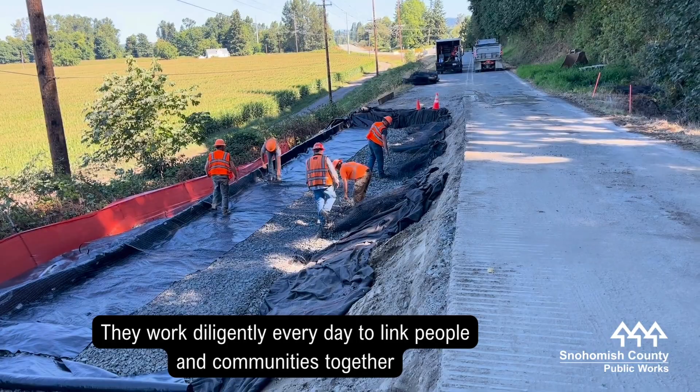I'm proud to serve alongside more than 600 dedicated professionals in the department's 5 divisions: road maintenance, engineering services, transportation and environmental services, solid waste, and administration. They work diligently every day to link people and communities together in Snohomish County by providing the best services and building the best infrastructure possible.

To highlight the important work our staff have accomplished over this past year, I'm pleased to present the 2025 Public Works Annual Report, Building Bridges and Connecting Communities.

2025 was the year of bridges. Snohomish County has more than 200 bridges located over nearly 2,200 square miles. Staff replaced 2 bridges on opposite ends of the county and provided maintenance for the iconic 76-year-old Red Bridge near Granite Falls. Without functioning bridges with up-to-date standards, travel and commerce, literally everything can come to a standstill, with people cut off or impacted by crossing restrictions.

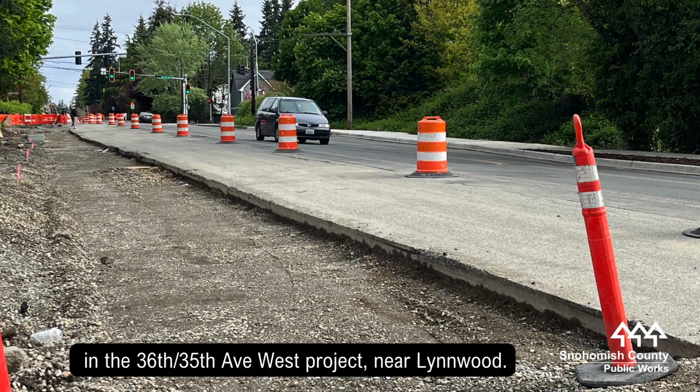Connecting Communities also took the form in the 36th/35th Avenue West project near Lynnwood. The project improved and modernized the 2-lane north and south roadway for an ever-growing population. It's important that we keep up with population growth and find ways to balance both human and environmental needs.

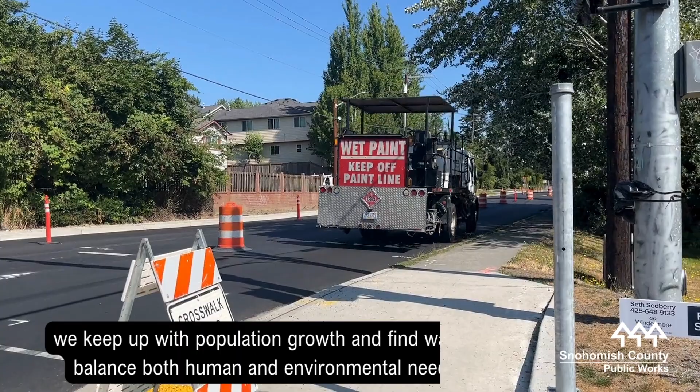The Solid Waste Division continues to fund operations at our 3 transfer stations and 3 drop box locations. The division processes more than 670,000 tons of garbage annually and processes household hazardous waste at our dedicated facility. These services are continuing at acceptable levels thanks to rates and fees being increased for the first time since 2009.

We're continuing to find ways to connect and build partnerships with our stakeholders. One example is the successful Adopt a Road program. In 2008, people imagined a partnership between residents and the county that would build community pride. 18 years later, the program is still going strong, with more than 40 resident-led groups maintaining sections of the county roadsides. We simply cannot do the work alone. We need community-minded people partnering with us to ensure county roadways are free from litter.

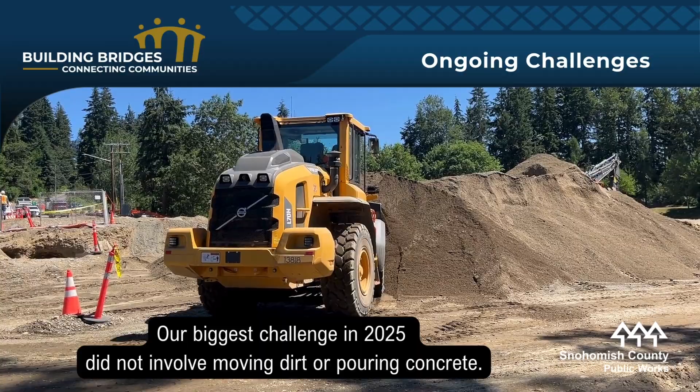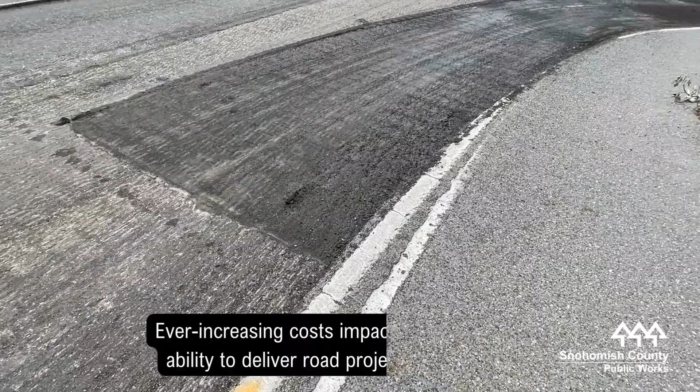Our biggest challenge in 2025 did not involve moving dirt or pouring concrete. It's been facing the complexities connecting our communities while weathering the impacts from inflation. Ever-increasing costs impact our ability to deliver road projects, obtain and service equipment, and provide maintenance for county infrastructure.

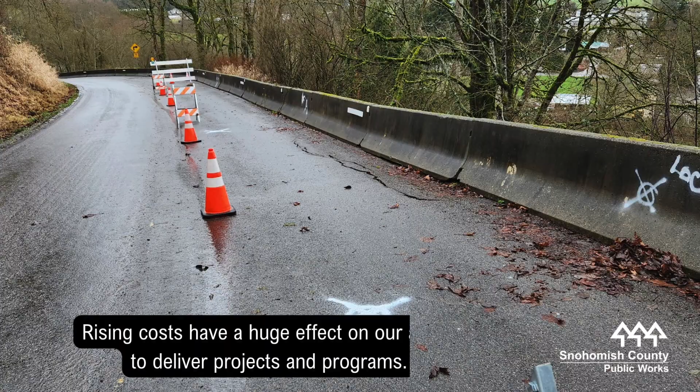Our staff have improved processes to save time and money, and we've also delayed capital projects because of the higher costs in their planning, design, and construction. We have kept and will continue to keep many positions vacant across the department. Rising costs have a huge effect on our ability to deliver projects and programs.

In 2026, we will continue to strategize and explore other funding mechanisms to keep services and projects moving as best we can. However, we're not out of the woods yet.

I'm proud of our teams for their continued work through adversity and uncertainty. I also appreciate our county leadership working with us to make sure taxpayer funds are spent wisely and the needs of our county residents, businesses, and visitors are met in these trying times.

We hope you enjoy our annual report. We're proud of the work done in 2025, and we're looking forward to maintaining our award-winning standard of excellence in 2026.

Whether our staff are building a mammoth structure, widening a busy road, or poring over a balance sheet, you can rest assured that Public Works is up to the task of building and bridging our community's needs now and into the future.

Hi, I'm Doug McCormick, Snohomish County Engineer and Deputy Director of Public Works.

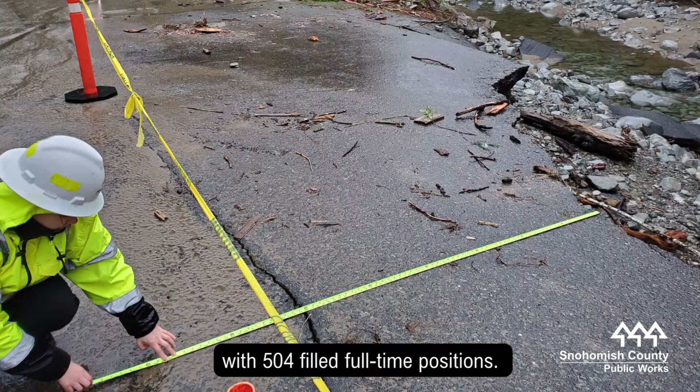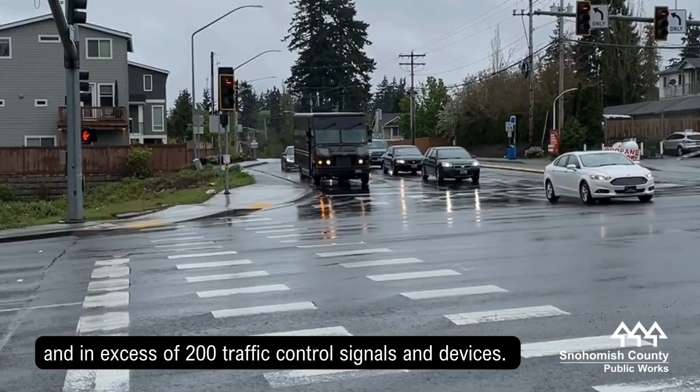Public Works is the second largest department in Snohomish County government, with 504 filled full-time positions. It is responsible for approximately 1,600 miles of county roads, 210 bridges, and in excess of 200 traffic control signals and devices. The department also processes more than 670,000 tons of garbage per year. Our mission is to focus on safety and mobility while practicing fiscal responsibility and preserving the environment.

You can learn more about Public Works, including information about our department budget, grant funding, and our department leadership by visiting snohomishcountywa.gov/publicworks.

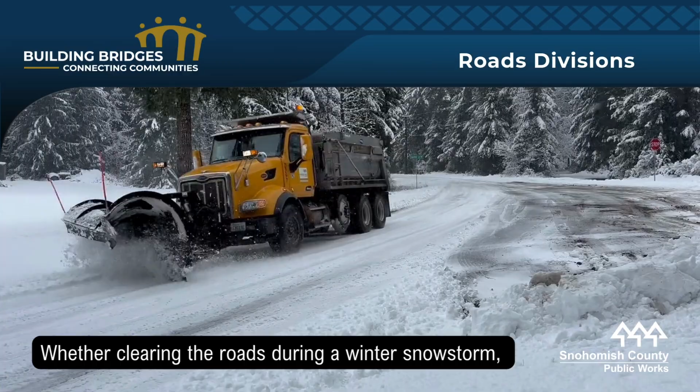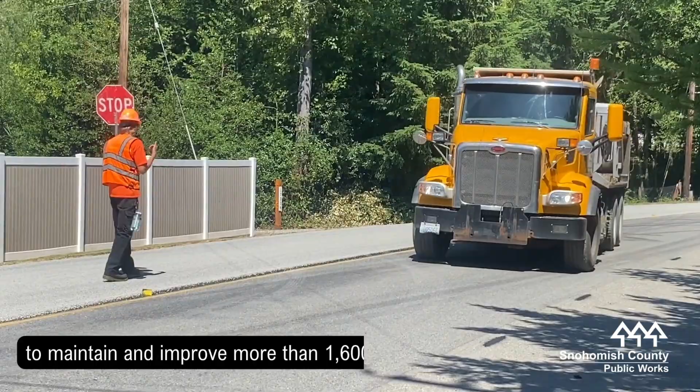Whether clearing the roads during a winter snowstorm, conducting road maintenance during the summer, planning road improvements to accommodate growth, or coordinating traffic light synchronization throughout the year, 3 divisions of Public Works keep residents moving. The Engineering Services, Transportation and Environmental Services, and Road Maintenance divisions work together to maintain and improve more than 1,600 miles of roadway, 210 bridges, and manage about 200 traffic control signals.

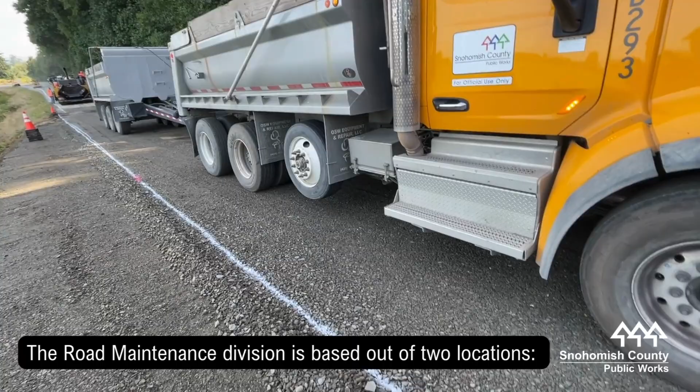Approximately half of those signals are within city limits and are managed for local cities. The Road Maintenance Division is based out of 2 locations, Arlington and Cathcart, located south of the city of Snohomish. The division performs most traditional public works functions, including maintaining and construction of the county's bridges, streets, and roads. Road maintenance also responds to emergencies such as floods, snow events, and windstorms.

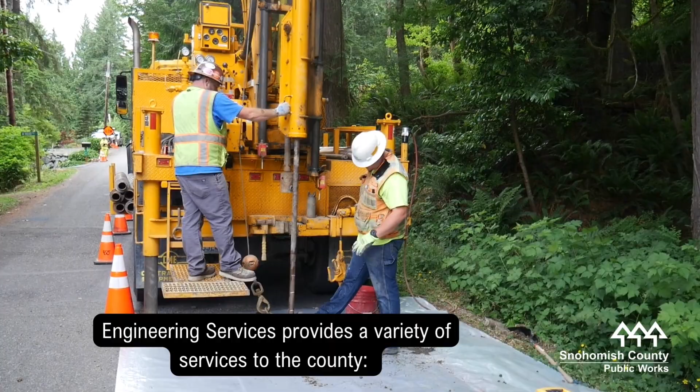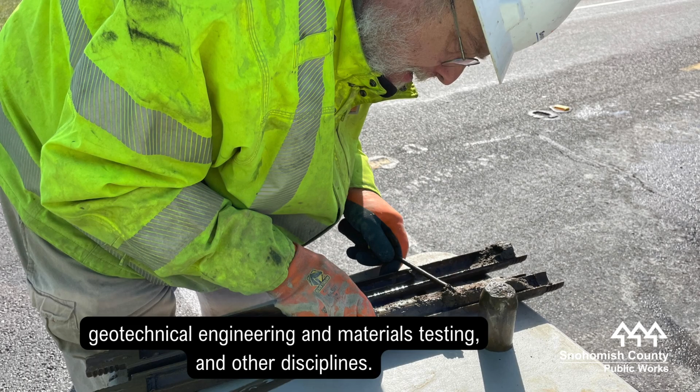Engineering Services provides a variety of services to the county: design and project development of roads and bridges, right-of-way acquisition and survey control, geotechnical engineering and materials testing, and other disciplines. Engineering Services also handles citizen inquiries about ongoing county capital road and bridge projects.

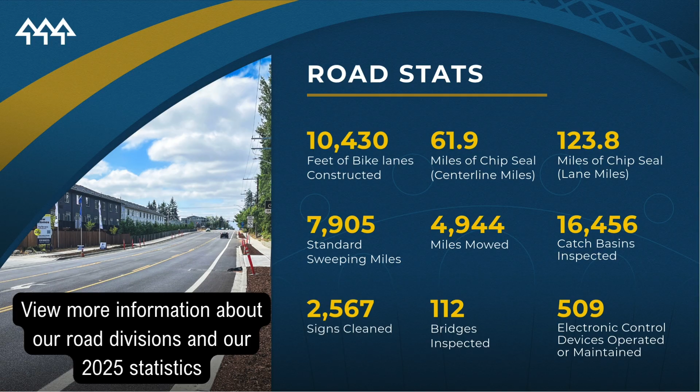View more information about our road divisions and our 2025 statistics by going online at www.snohomishcountywa.gov/204.

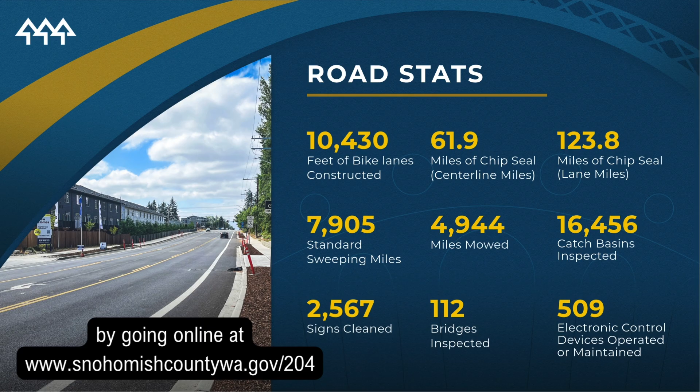The Snohomish County Public Works Solid Waste Division, in coordination with many service providers, oversees all county programs and facilities for the disposal of household hazardous materials, garbage, and recycling. Local garbage haulers transport waste collection from residential curbsides to 3 transfer stations in Mountlake Terrace, South Everett, and Arlington. The division also operates 3 drop boxes in Sultan and near Granite Falls and Lake Stevens.

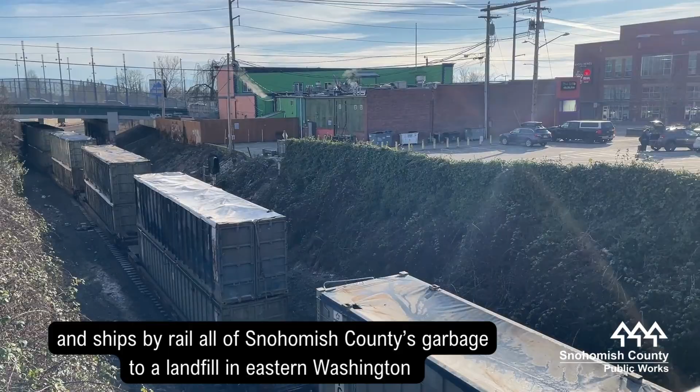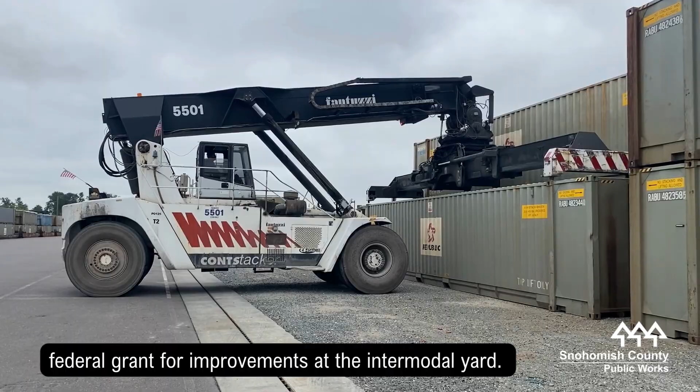From there, solid waste consolidates and ships by rail all of Snohomish County's garbage to a landfill in eastern Washington from the county's intermodal yard in North Everett. In 2025, the county received a $2 million federal grant for improvements at the intermodal yard. Plans are underway to add a second rail line at the facility to more efficiently manage the flow of processed waste on its way to landfills.

A couple of notable changes will take place in 2026. The Solid Waste Division will raise fees for the first time since 2009. This increase will allow the division to maintain current levels of service. For our current fee schedule, visit www.snohomishcountywa.gov/6739.

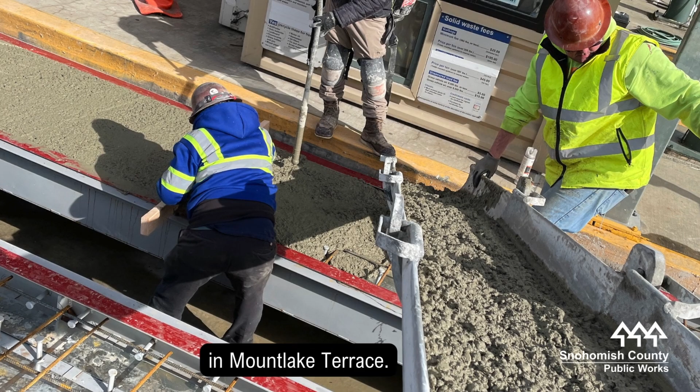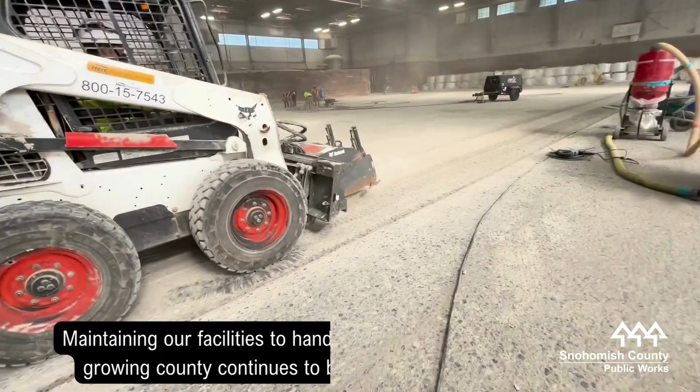In 2026, the Solid Waste Division is planning to replace its weigh scales at the Southwest Recycling and Transfer Station in Mountlake Terrace. The division also plans on repairing and improving the tipping floor at the Airport Road Recycling and Transfer Station in Everett. Maintaining our facilities to handle the needs of our growing county continues to be a top priority, and we're doing everything we can to ensure tax dollars and fees are used properly.

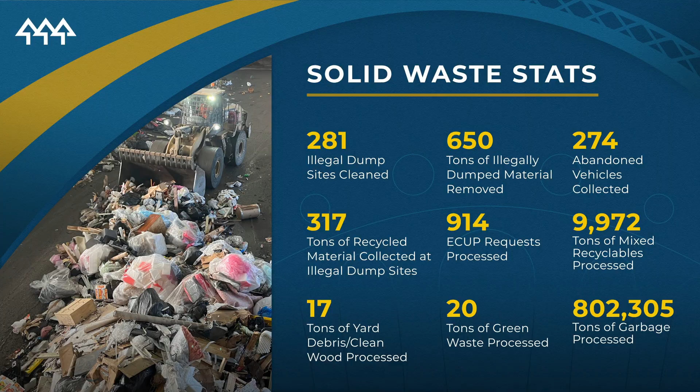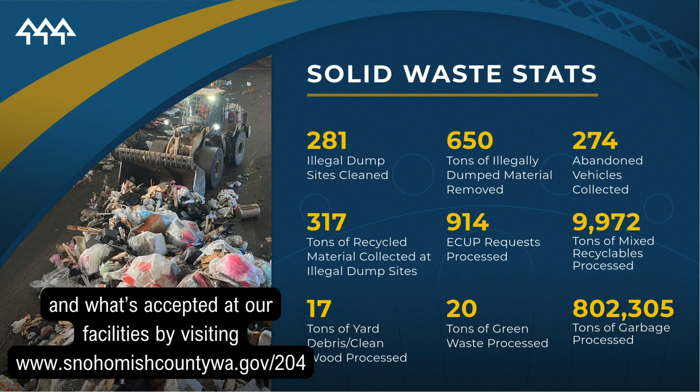You can view more information online, including our 2025 statistics and what's accepted at our facilities, by visiting www.snohomishcountywa.gov/204.

Public Works continued its award-winning tradition of superior service in 2025 by garnering several prestigious awards. The Index Galena Road Flood Repair Project, which opened in November of 2023, received national recognition from the American Public Works Association as an APWA Project of the Year. After 17 years of challenges, the project restored critical access to a community and reopened a recreational gateway to the upper Skykomish River and Wild Sky Wilderness. For their contributions, Snohomish County Public Works, WSP Global Incorporated, and Goodfellow Brothers were presented with the Project of the Year Award in the Transportation $25 to $75 million category at the APWA Annual Expo in Chicago in August of 2025.

The Little Bear Creek Advanced Mitigation Site project, which won the APWA Project of the Year in 2024, received the Puget Sound Regional Council's Vision 2050 Award. The PSRC Vision 2050 Award recognizes work done in the region that creates a better future for the central Puget Sound. As a winner in the Vision 2050 on the ground category, LBCAMS has demonstrated the PSRC's vision in open space preservation and transportation investments.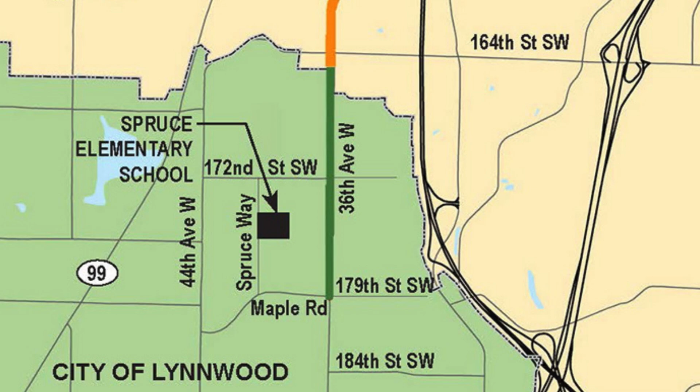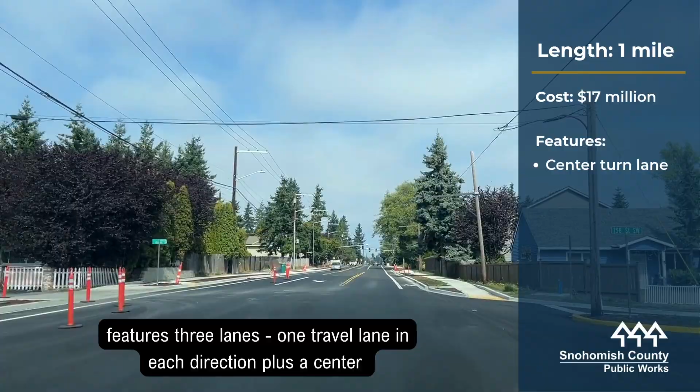Thirty-sixth and 35th Avenues West is a critical north-south corridor in the Lynnwood area. After years of planning and construction by Snohomish County and the city of Lynnwood, the end result is a driver, bicyclist, and pedestrian-friendly corridor from central Lynnwood to State Route 99. Prior to construction, the 1-mile Snohomish County segment of the corridor from 164th Street Southwest to 148th Street Southwest featured one travel lane in each direction with intermittent sidewalks. With the completion of the $17 million project, the corridor now features 3 lanes, one travel lane each direction plus a center turn lane, bus pullouts, and continuous sidewalks and bike lanes. The project is expected to improve safety and mobility for drivers, pedestrians, and cyclists for many years to come.

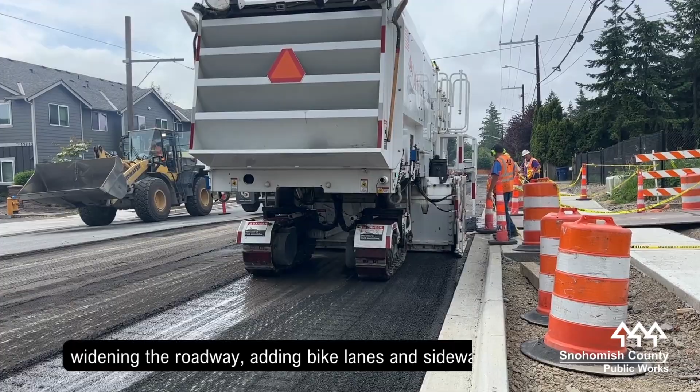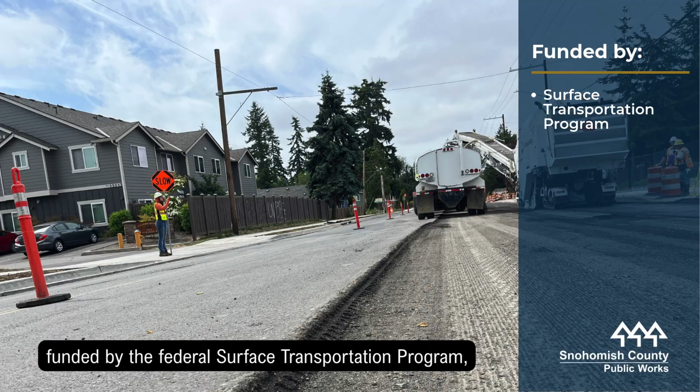Snohomish County construction activities started in the spring of 2024 and concluded in the fall of 2025. Work included improving underground utilities and stormwater management, widening the roadway, adding bike lanes and sidewalks, and putting down a fresh layer of asphalt. The project was constructed by Marshbank Construction and funded by the Federal Surface Transportation Program, the State Transportation Improvement Board, the State Public Works Board, mitigation fees, and the County Road Fund.

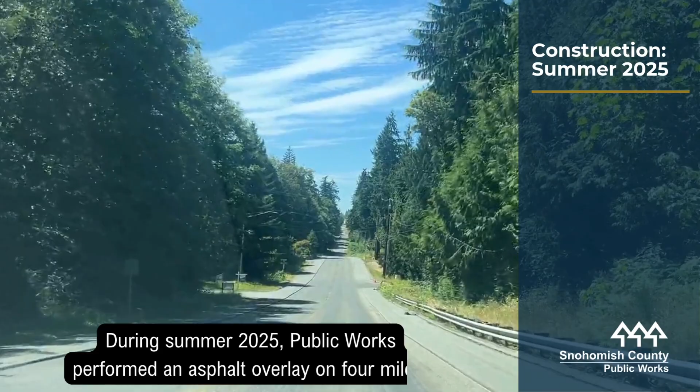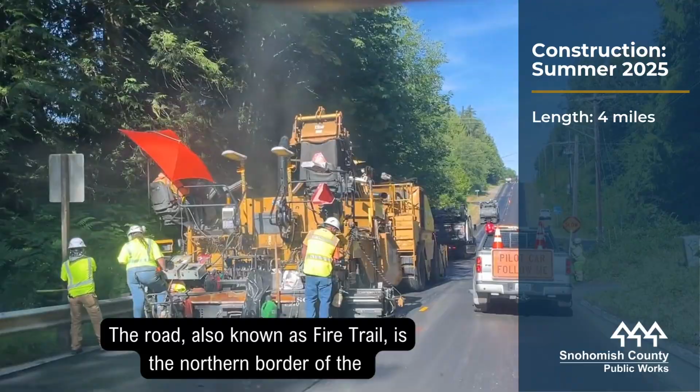During summer 2025, Public Works performed an asphalt overlay on 4 miles of 140th Street Northwest-Northeast from 63rd Drive Northwest to 3rd Avenue Northeast. The road, also known as Fire Trail, is the northern border of the Tulalip Reservation and helps connect rural areas of northwest Snohomish County with Interstate 5 and commercial centers.

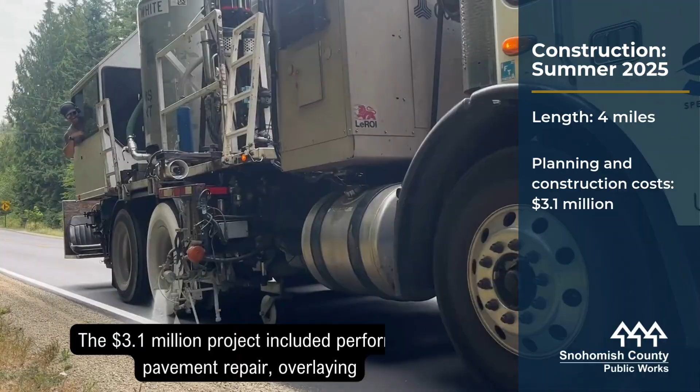The $3.1 million project included performing pavement repair, overlaying fresh asphalt, and restriping the road. Granite Construction performed the work, and the project was funded by the Federal Surface Transportation Program and the County Road Fund. The preservation project is expected to extend the useful life of the roadway and preserve the pavement for many years to come.

Nearly 10,000 vehicles travel daily across Swamp Creek Bridge 503 on Locust Way between the cities of Brier and Bothell. Built in 1960, the original 41-foot-long bridge had narrow lanes, no shoulders or sidewalks, and its vehicle weight limit had been reduced.

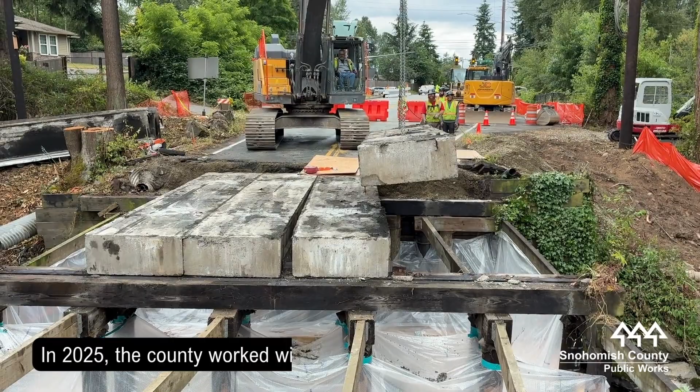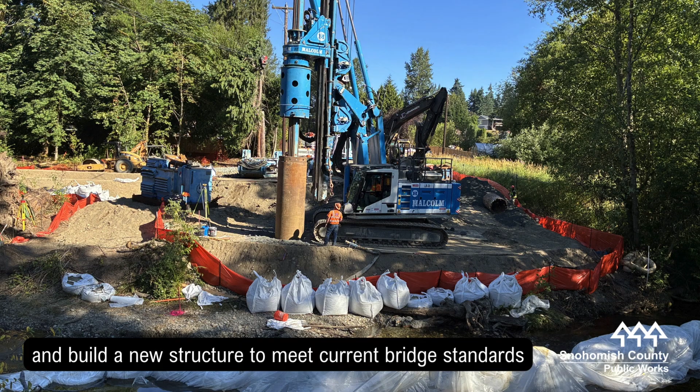In 2025, the county worked with Johansson Construction and 21 subcontractors to remove the old bridge and build a new structure to meet current bridge standards and accommodate present-day traffic loads.

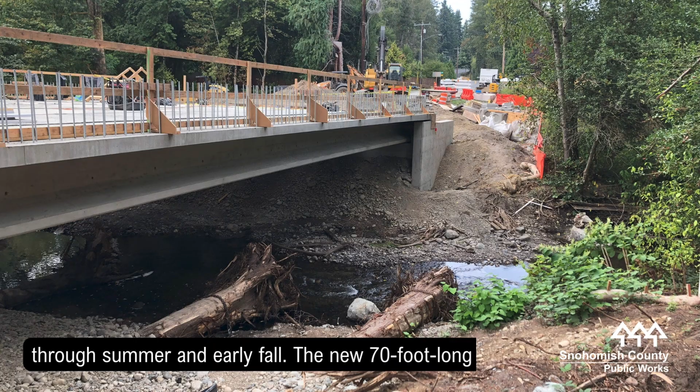Construction lasted from June through November and required a signed detour through summer and early fall. The new 70-foot-long bridge opened to traffic in late October and features wider lanes for motorists and bicyclists and dedicated sidewalks for pedestrians.

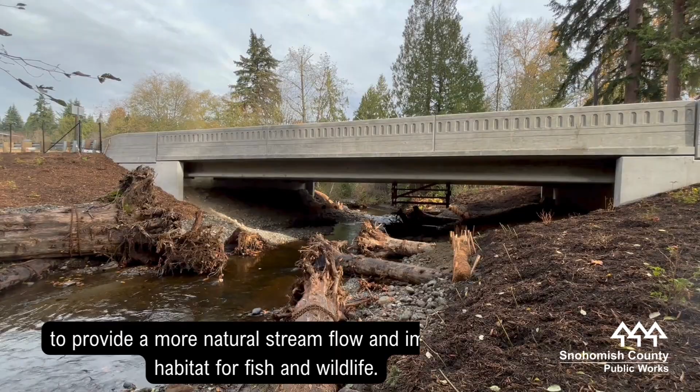Its longer, single-span design removes timber piles from Swamp Creek to provide a more natural stream flow and improved habitat for fish and wildlife.

Funding for the $5.7 million project was provided by the Federal Highway Administration Local Bridge Program and County Road Fund.

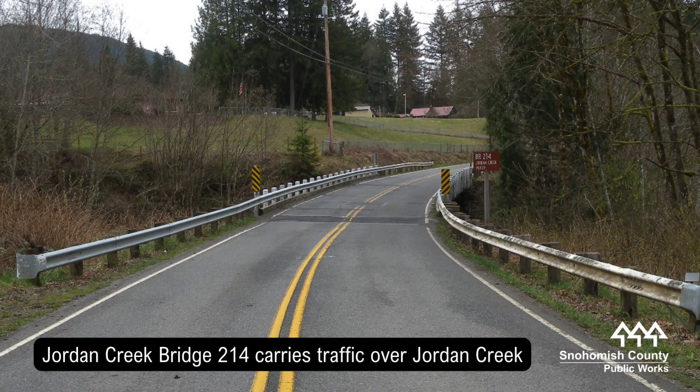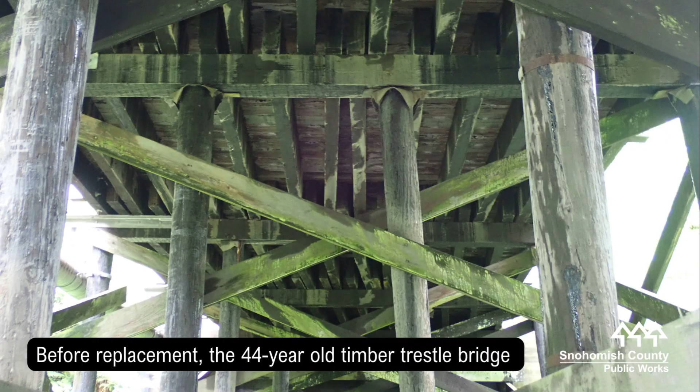Jordan Creek Bridge 214 carries traffic over Jordan Creek along Jordan Road, a popular residential and commercial route between Arlington and Granite Falls. Before replacement, the 44-year-old timber trestle bridge was 21 feet wide and 107 feet long.

It showed signs of deterioration, required frequent maintenance, and was reduced to a single lane with load restrictions in 2019. Snohomish County partnered with Interwest Construction and more than 20 subcontractors to remove and rebuild the bridge in the summer and fall of 2025.

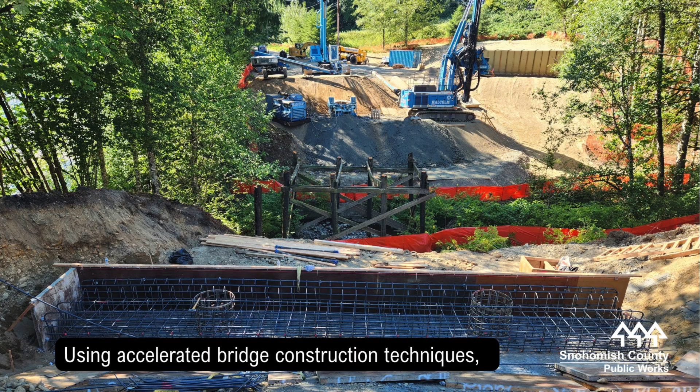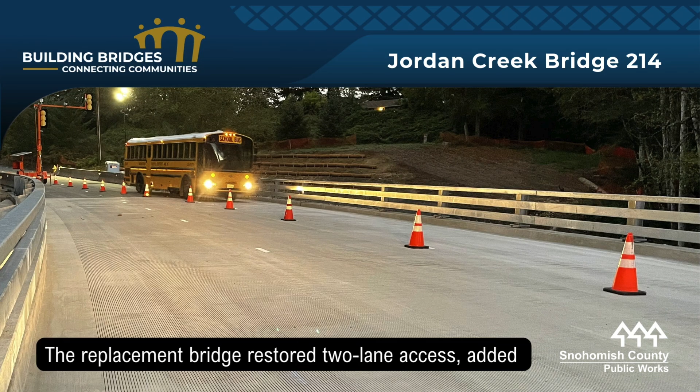Using accelerated bridge construction techniques, crews reduced the duration of the road closure and finished construction in a single season. The replacement bridge restored two-lane access, added wider lanes for cyclists and pedestrians, and removed weight restrictions.

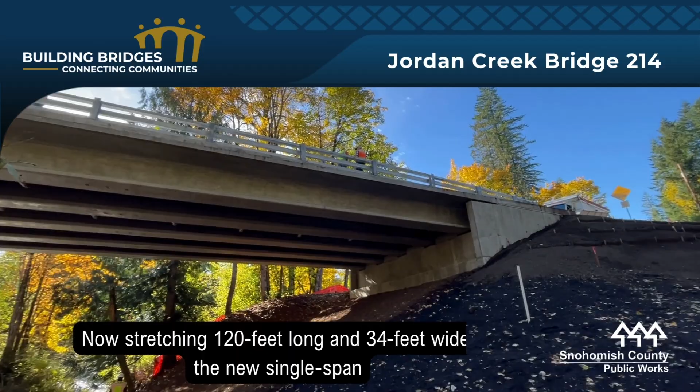Now stretching 120 feet long and 34 feet wide, the new single-span concrete structure meets current bridge and seismic standards and improves stream habitat for fish and wildlife.

Funding for the $8 million project was made possible through the Federal Highway Administration Local Bridge Program.

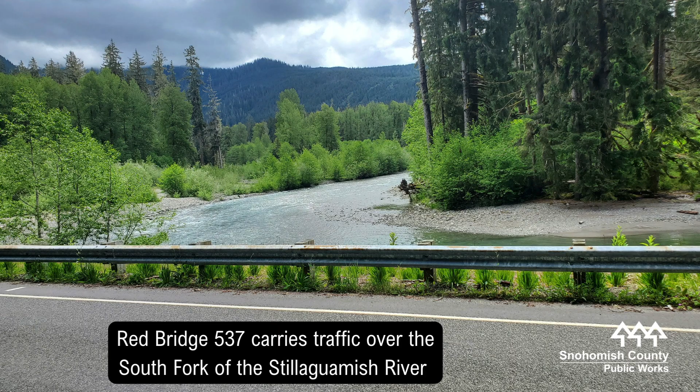Red Bridge 537 carries traffic over the South Fork of the Stillaguamish River along the scenic Mountain Loop Highway in the Mount Baker Snoqualmie National Forest, located 18 miles east of Granite Falls.

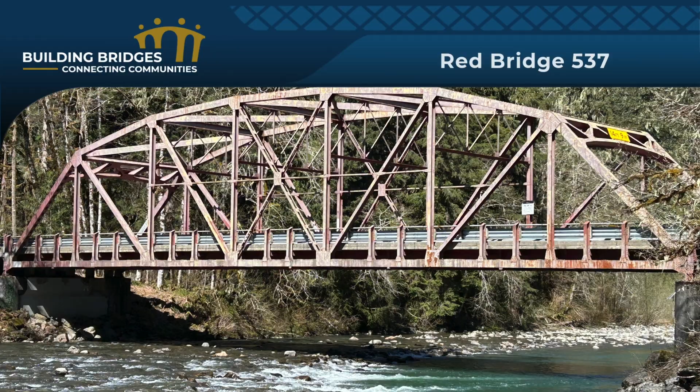Built in 1954, the 161-foot-long structure had varying levels of corrosion, deteriorating lead-based paint, and was load-restricted.

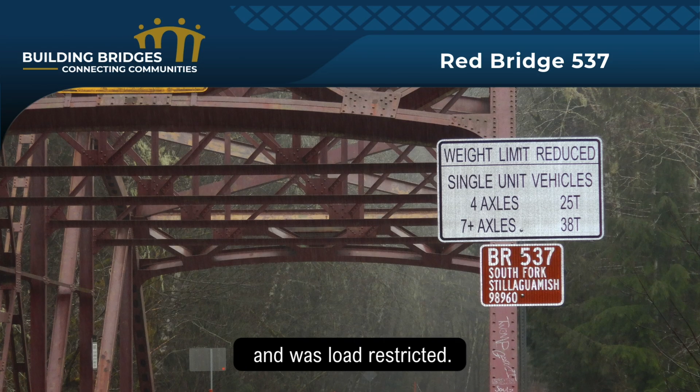Crews carefully wrapped the entire bridge and removed the old paint using a containment and vacuum collection system to keep particles out of the river.

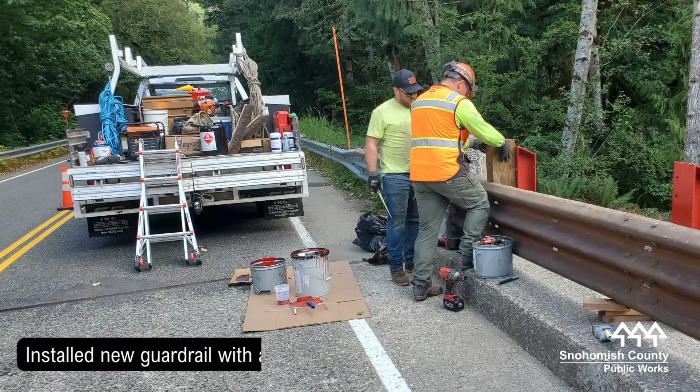Teams repaired the structural steel trusses, replaced 194 corroded rivets, performed expansion joint repairs, and installed new guardrail with aesthetic weathering treatment. The bridge was painted using a modern 5-coat paint system to prevent corrosion.

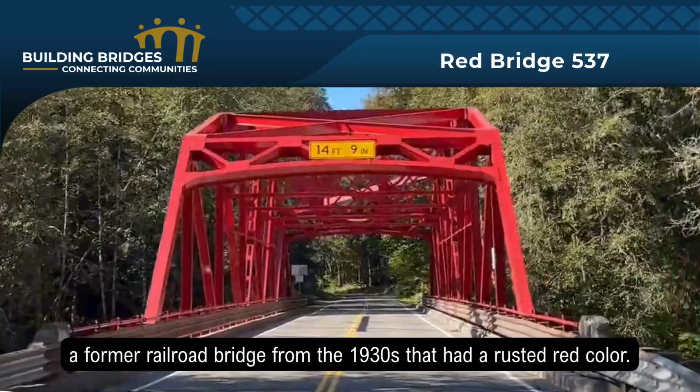The vibrant color, insignia red, was chosen to commemorate a former railroad bridge from the 1930s that had a rusted red color. Working with our partners at Combined Construction, the $3.6 million project finished more than 2 months early.

Funding was provided by the Federal Highway Administration Federal Highways Bridge Program.

When the weather turns and rivers rise, Public Works springs into action. In early December 2025, much of western Washington was inundated with atmospheric river weather systems.

Steady rain combined with warmer than normal temperatures quickly overwhelmed the channels of area rivers and streams, resulting in widespread flooding. At the height of the flood event, 56 square miles of Snohomish County was underwater.

The county suffered more than $3 million in damages. The county activated its Emergency Operations Center on December 9th.

Public Works road maintenance crews provided support during the emergency by giving real-time updates about the county's road closure map. Staff kept roads clear of fallen debris and ensured motorists were rerouted.

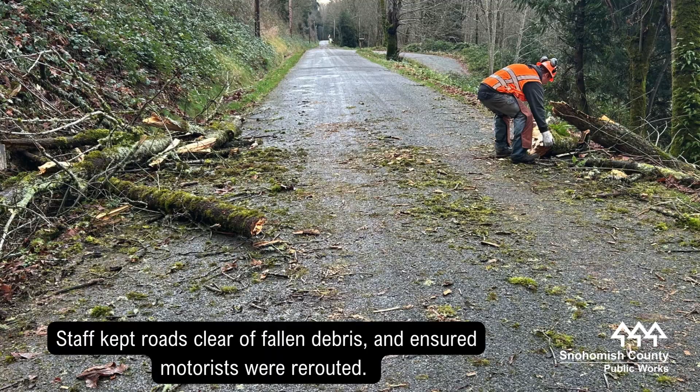Roads were assessed and cleaned up once the waters receded. Damage to the road network was widespread. In the eastern portion of the county, sections of highways and county roads were the hardest hit.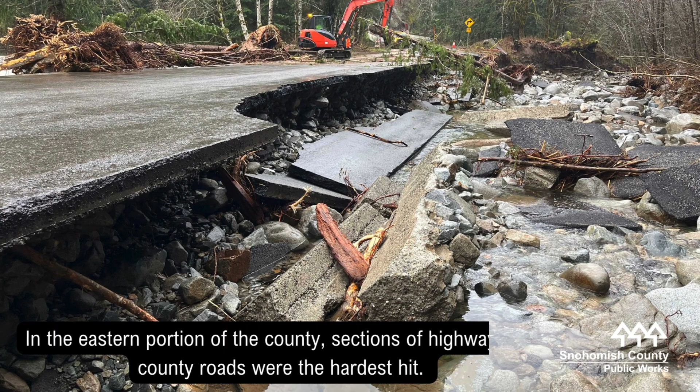Public Works divisions and teams contributed to the flood response in several ways. The Solid Waste Division activated a voucher program during the event to ensure that residents in flood-ravaged areas of the county were able to dispose of flood-damaged household materials and other debris for no fee at county transfer stations and drop boxes.

The department's public information staff assisted in countywide emergency communication support by providing the latest information about area road and facility closures to media outlets, social media, and on various public-facing information channels.

Public Works engineers assisted in emergency response functions during the event by working with the county's Department of Emergency Management.

Geotechnical staff assessed landslide-prone areas during the flooding, and the bridge team members in the engineering and road maintenance divisions inspected the flood-ravaged roads and bridges to make sure they were safe to reopen to the public.

Emergency response to the flood event ended before Christmas, but for many in the county and in the state, the effects of the flood will be felt for years to come.

Public Works thanks the county's residents and businesses for their patience, courage, and steadfastness in the face of adversity and uncertainty.

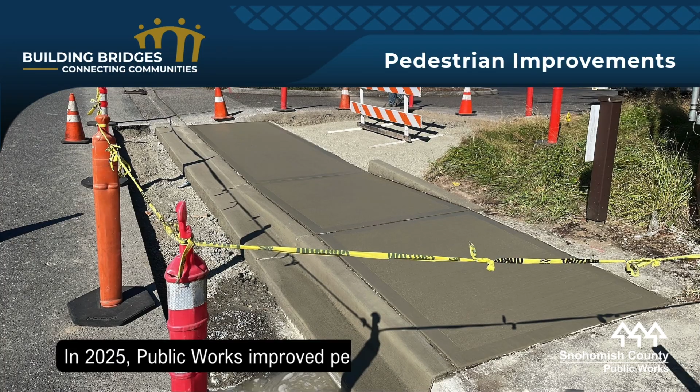In 2025, Public Works improved pedestrian facilities at 12 locations with higher volumes of sidewalk traffic. All improvements met Americans with Disabilities Act, or ADA, standards.

In early summer, crews upgraded pedestrian crossing signs with rectangular rapid flashing beacons, or RRFBs, on Puget Park Drive in the Snohomish area, near the entrance to Willis Tucker Park. RRFBs make crossing locations more visible to motorists, which helps promote pedestrian safety. Funding for the $317,000 project was provided by the Transportation Improvement Board and the Snohomish County Road Fund.

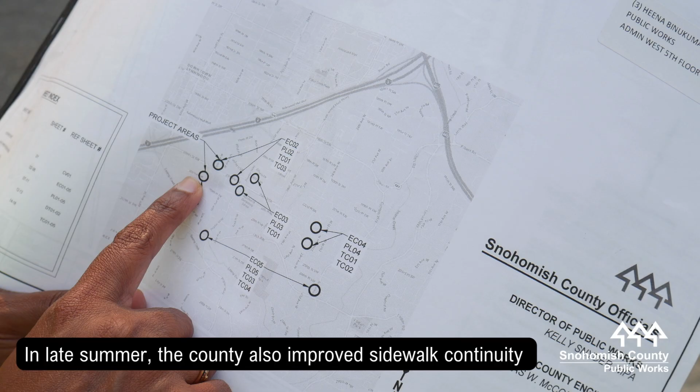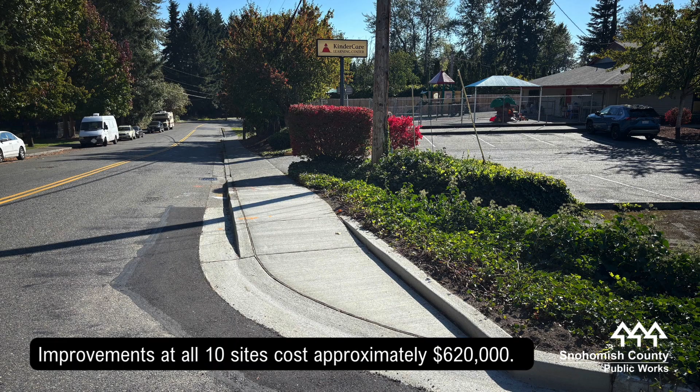In late summer, the county also improved sidewalk continuity at 10 locations near 204th Street Southwest in the Lynnwood area. Crews constructed new sidewalks, improved driveway crossings, and installed curb ramps with tactile surfaces to make the public right-of-way more accessible for pedestrians and people with disabilities. Improvements at all 10 sites cost approximately $620,000. Funding was provided by a Transportation Improvement Board Complete Streets Grant and the County Road Fund.

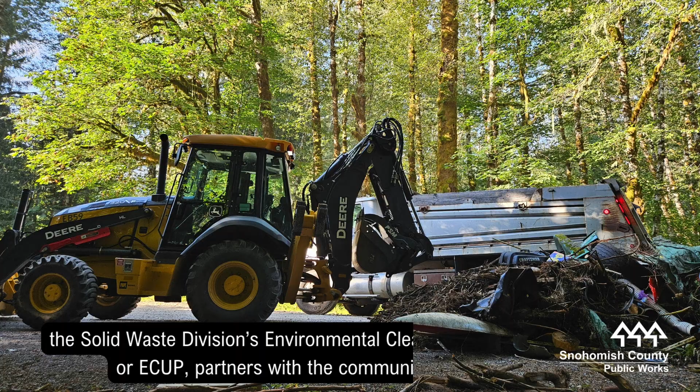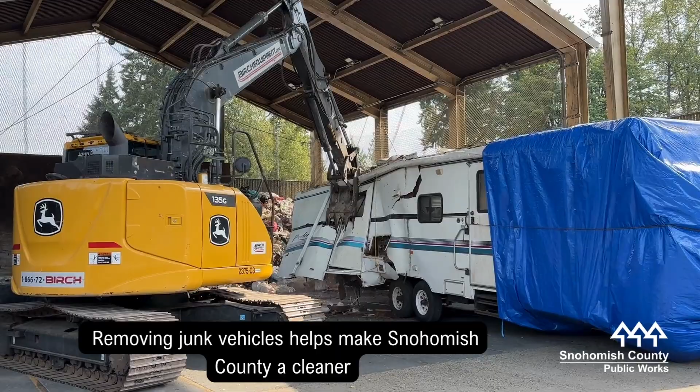As part of Public Works' overall strategy in keeping Snohomish County litter-free, the Solid Waste Division's Environmental Cleanup Program, or ECUP, partners with the community to rid our county of unwanted vehicles from private property. ECUP also offers vehicle identification number inspections in this effort. Removing junk vehicles helps make Snohomish County a cleaner, more beautiful place to visit and live, while enhancing the quality of life for present and future generations.

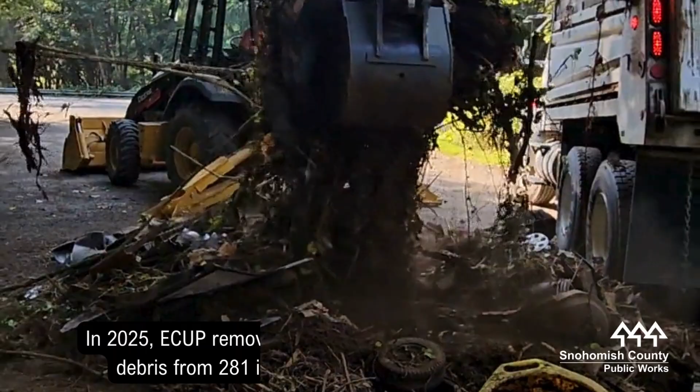In 2025, the ECUP team removed nearly 300 abandoned passenger vehicles, RVs, and boats from unincorporated county locations and private properties. The ECUP team also responds to calls from the community to remove debris from roadsides and on unincorporated county property. In 2025, ECUP removed nearly 650 tons of debris from 281 illegal dump sites.

For more information on ECUP, visit www.snohomishcountywa.gov/546.

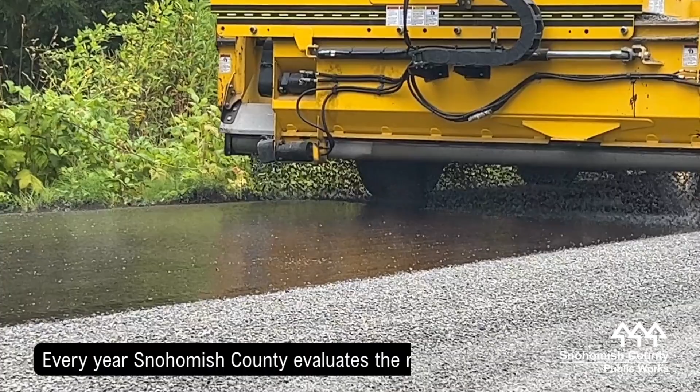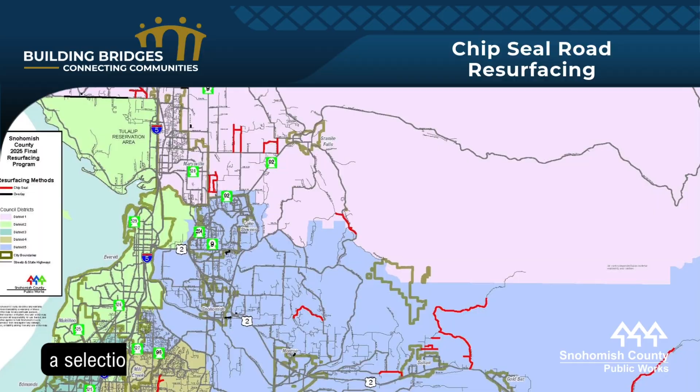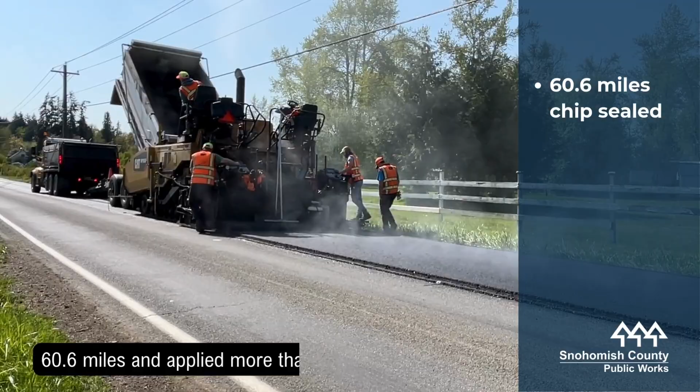Every year, Snohomish County evaluates the road network and develops a multi-year preservation and maintenance plan. This proactive preservation work involves resurfacing a selection of roads each summer to protect the roadbed and extend the useful life of the road. During 2025, road maintenance crews chip-sealed 60.6 miles and applied more than 22,000 tons of asphalt across the road network.

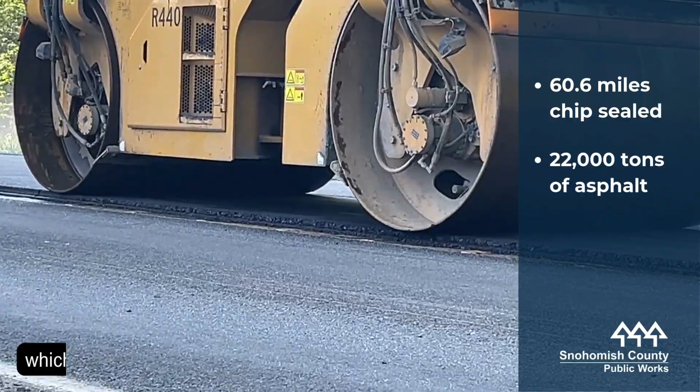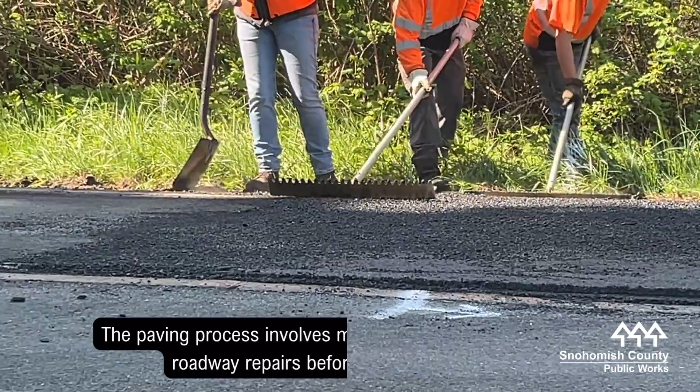Much of the resurfacing work was in the form of chip sealing, which includes pre-leveling the road and filling in potholes as needed, then applying a thin layer of asphalt oil, followed by a layer of crushed rock, and finally pressing the rocks into place with a roller. The paving process involves making any roadway repairs before overlaying the existing road with a fresh layer of asphalt. Road preservation treatments today help reduce costly repairs in the future.

Learn more about the road resurfacing program by visiting snohomishcountywa.gov/512.

Since 2008, the Adopt a Road program has brought volunteer groups in Snohomish County together to keep roadsides free of litter, enhance the quality of the environment, and promote community pride. Adopt a Road is managed by Public Works and utilizes a targeted and strategic approach in keeping roads litter-free throughout the county.

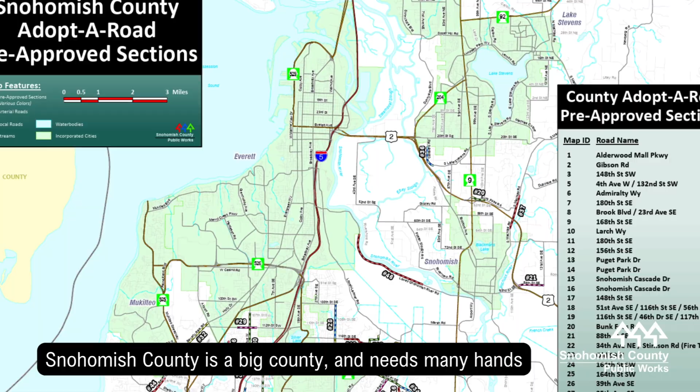Snohomish County is a big county and needs many hands of all who live, work, and play here to participate in keeping our section of the Evergreen State clean and beautiful.

Adopt a Road volunteers devote their time to conducting at least 2 cleanups per year for an initial term of 2 years. At the end of 2025, 46 businesses, nonprofits, individuals, faith-based groups, and school-based clubs maintain 53 separate sections of unincorporated county roadway. In 2025, the county recognized one group's members who have volunteered faithfully since 2015. The group joins other active groups that have been keeping their sections clean for more than a decade.

With reduced staffing levels that affected Public Works' ability to field a litter control team in 2025, it's more important than ever to have dedicated volunteers in our communities.

Public Works appreciates the hard work and dedication from involved and caring people who devote their time keeping Snohomish County clean. Learn how you can adopt a section of county roadway by visiting www.snohomishcountywa.gov/664.

Snohomish County Public Works is in the community daily, processing waste and maintaining the road network. But sometimes the hard hats come off and we meet the public where they are to answer questions, share important information, and inspire future generations of Public Works employees.